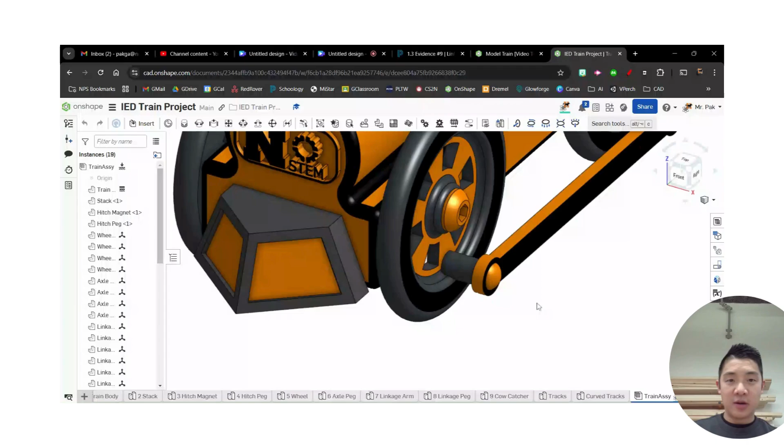All right, last but not least, our final part here is this little linkage peg. Hopefully at this point it should be a pretty easy one, but a couple dimensions. This looks like a revolve. I'm going to do what we did with the axle peg, where I'll create this little cylindrical part first, and then create the head of it.

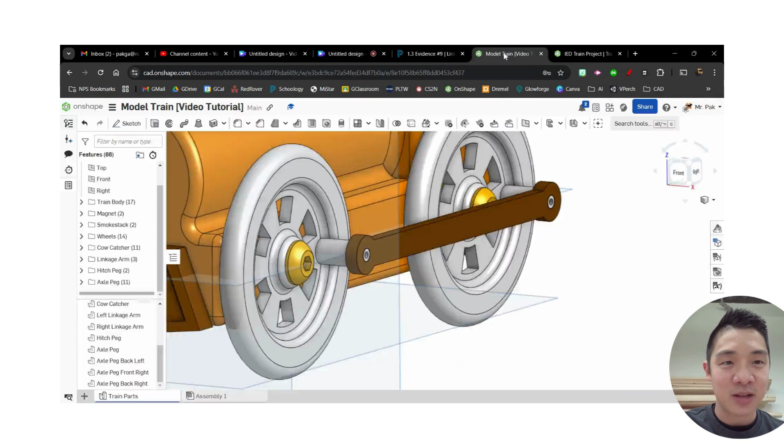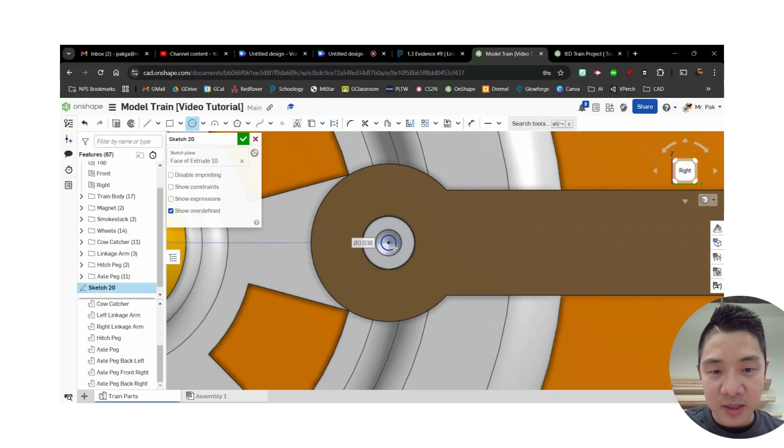Okay, so here we are, modeling this one in place like we did last time. I'm going to start a new sketch right on the face of this guy. To do this, I'm going to zoom in here and create a small circle, going to keep it really small for now. I'm going to double check what the size is. See, it's a diameter of 0.0625.

So dimension this guy, 0.0625, hit enter. Oh, and it does match that circle. I'm also going to create a little point here right in the middle, and we're going to reuse that in a second. That's why I want to have that there.

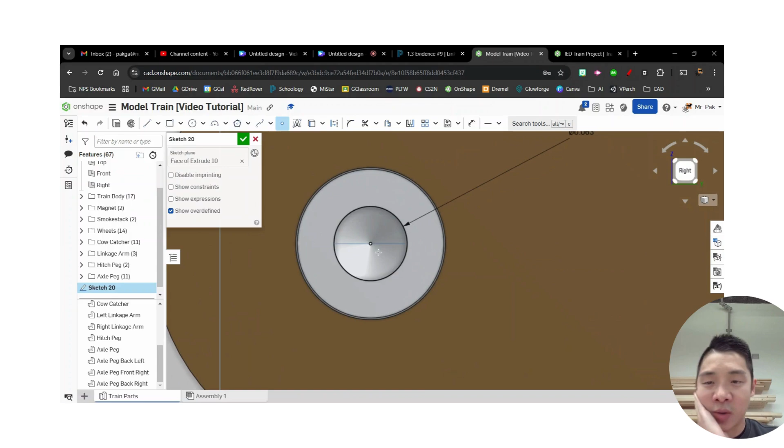So after we've got that portion, I'm going to go ahead and extrude that shape. It's going to be, again, the base of the peg. Flip the direction of it. Just need to know the length. This length is shown right here, 0.25. Type that in, 0.25. I'll just do that blind. Hit the check. Okay, so right now I've got that.

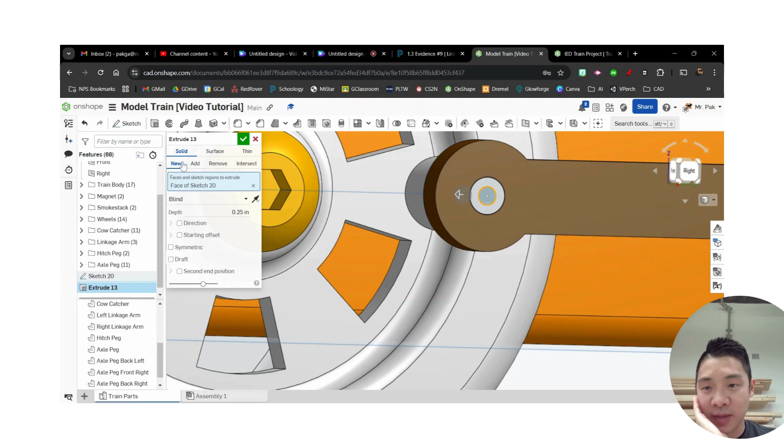Oh, and looks like it accidentally changed it to an add. I want to make sure that's a new part, so make sure you double check that. New part, 0.25, hit the check. All right, so there's the base of our peg.

Next up, we've got this little dome shape. In order to do that, first off, I'm going to unhide or show the sketch again, because I'm going to use this point. I do want a plane right there.

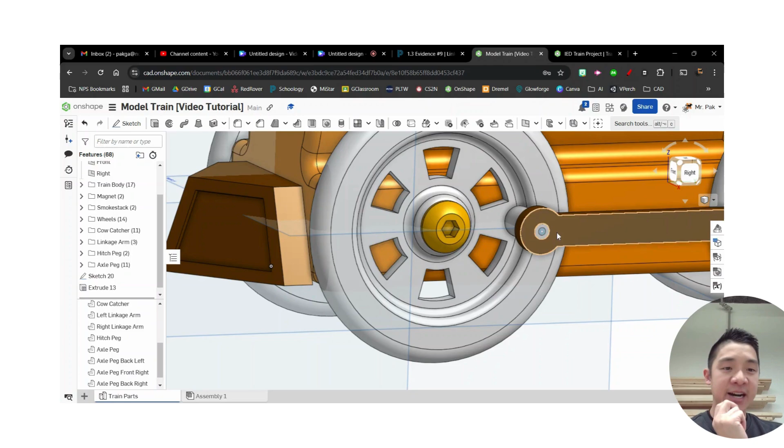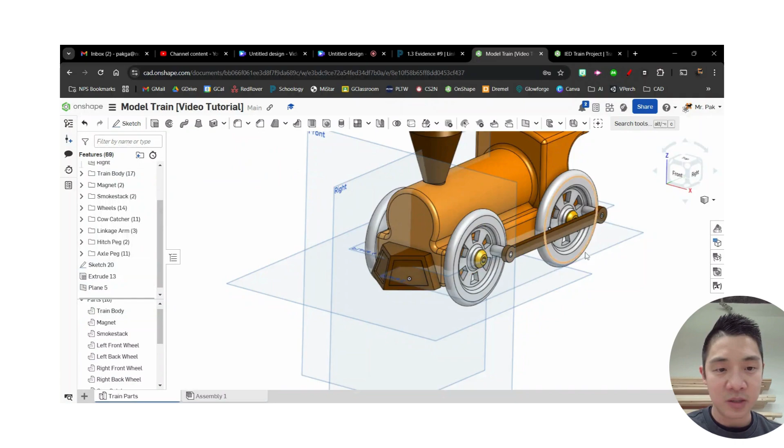Again, I could measure it, but another way we could do this plane is using, instead of offset, plane and a point. The plane I want to have parallel with the bottom. The point I want it to intersect is that point. And now I should have plane number 5 cutting right across there. Hit the check. If you can kind of see, it's kind of hard to tell here, but it is cutting it right through the middle there.

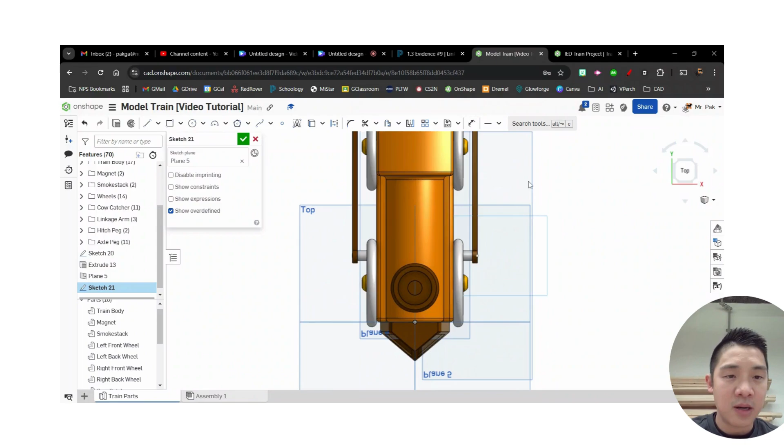All right, so now I'm going to start a new sketch on that plane 5. I'm just going to choose it from the list here since I know that's the one I want, and let's look at it from the top. If you ever want to, I believe there's actually a little shortcut. Before I do a sketch, if you wanted to hide some of the planes, there's plane 5. Let's say this one is kind of in the way. If I hit the letter P, it actually hides all the planes, so just be careful. If I hit P again, then it'll show them.

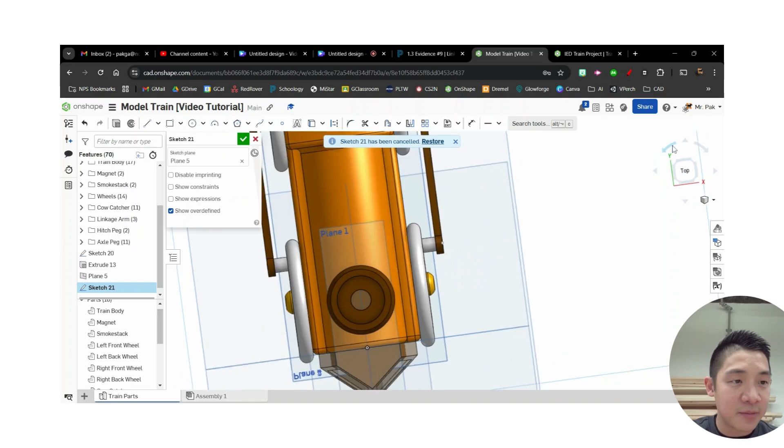Okay, so in this case I do want to sketch on plane 5, rotating it around just so we're seeing it straight on. And it's going to be this portion right here. So I saved that point from earlier just so I know that's the center I want to work with. All right, next up, just creating this little arc shape with the line.

So let's come back over here, gonna extend this line out, and then maybe I'll do another line over here. Again, I'm just eyeballing it for now, it's probably going to be way smaller than that. And then finally I need that 3-point arc. Let's go and click here. For now I'm just going to leave it without any constraint on this side.

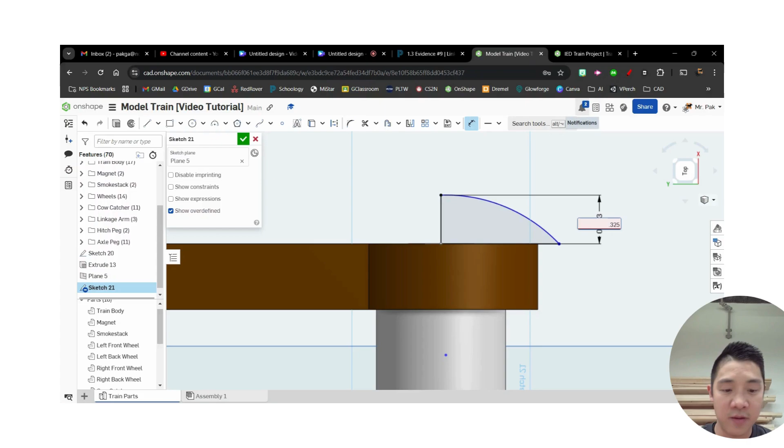Okay, now I'm getting the overall height is 0.325. So if I want to adjust this top portion, I'm going to subtract the 2, 0.325 minus 0.25. Let's go ahead and do that. Dimension from here to here. Again, it was 0.325 minus 0.25. There's that. And then the radius was 0.1562, so from here, 0.1562.

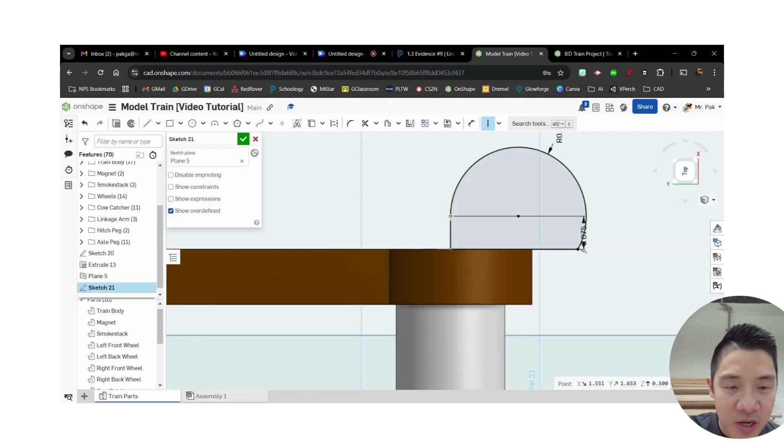Notice that this is still blue. What I'm seeing is showing to me is this point and this point need to be in line with each other. So in this case it's a little bit strange, but this actually should be vertical because we're looking at it from the side. So I'm going to have this vertical to that. Just kidding, I'm going to undo that, Control Z. I am going to make that horizontal, that's what I meant. Okay, that locks this in line with each other. All right, now it's all black. Hit the check.

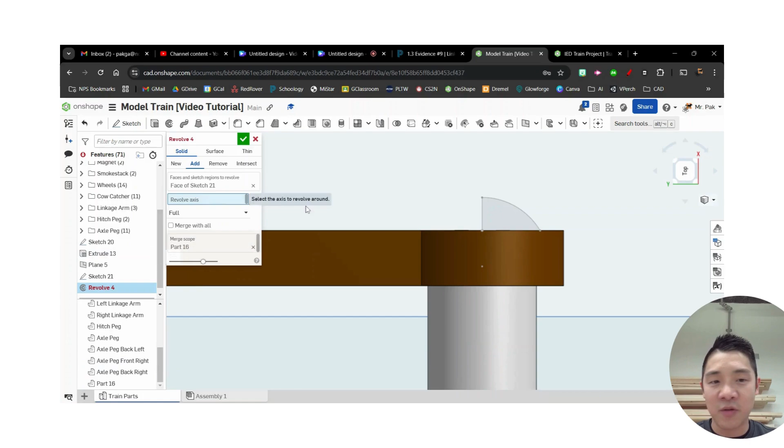We'll revolve that shape. Remember, this is going to be adding, and I'm going to add this to the part that I was making earlier, the little peg portion there. And then the revolve axis is just the middle of that. Now it should be all one part. Hit the check. Right, we've got that little peg all set up.

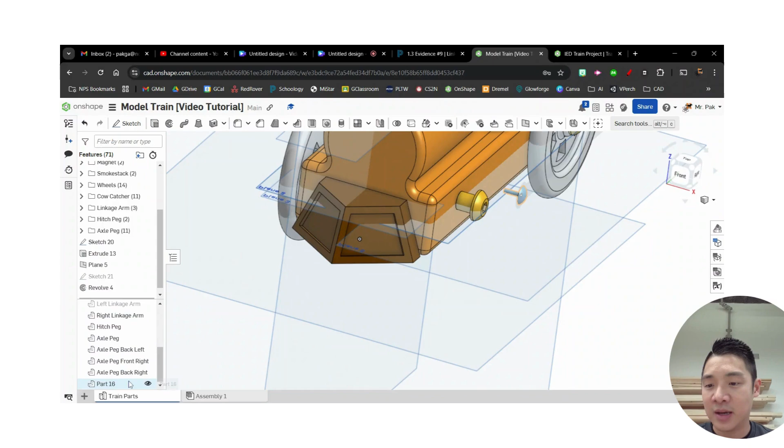And if you want to double check, I might, for example, let's hide the linkage arm here, and maybe I'll hide that left front wheel just to show you. Okay, I've got that peg all set up. And like we were doing before, I'll unhide those again.

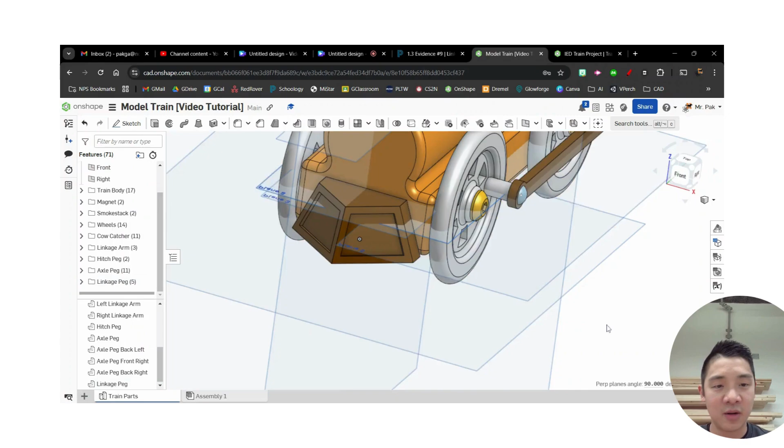Okay, let's go ahead and organize ourselves. Right click after we selected them. This is for the linkage peg, check mark. Rename the part, linkage peg. And hopefully from the other videos you saw, if you wanted to replicate those with the linear pattern and mirror, you could do that as well. You can always change the color as well if you want to do that. You can make it, I don't know, black or something.

All right, that should wrap up all of our parts. Next video, we'll talk about assembly.